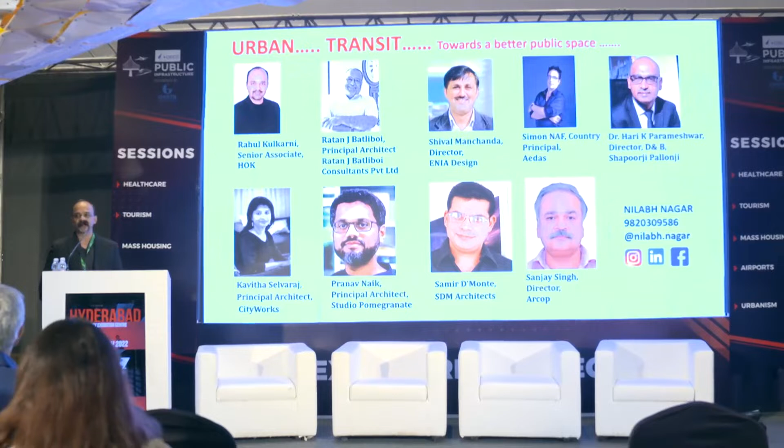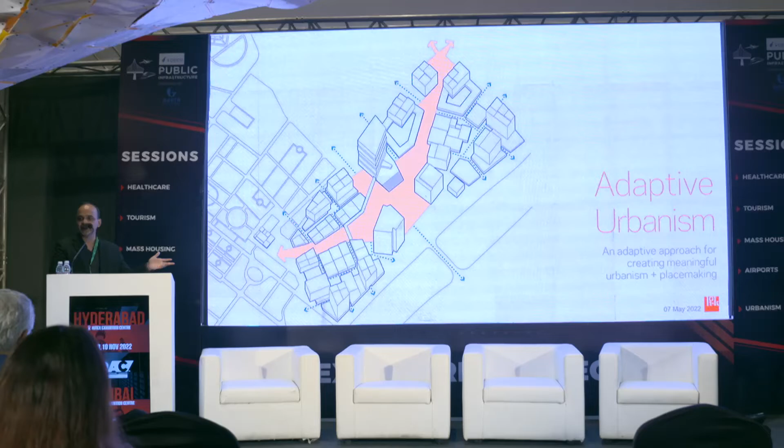I'm Rahul Kulkarni. I'm based in HOK's India office in Mumbai, and I work with our international offices to help coordinate projects in India. Today, I'm going to talk about a topic called adaptive urbanism, and this is a topic that's very close to my heart. I'm a master planner, urban designer myself, and what I wanted to showcase here was probably an alternative approach of master planning that our team has been practicing across the world. There are two case studies that I thought I could share, which might lead to some takeaways, hopefully. So with that, we'll get started.

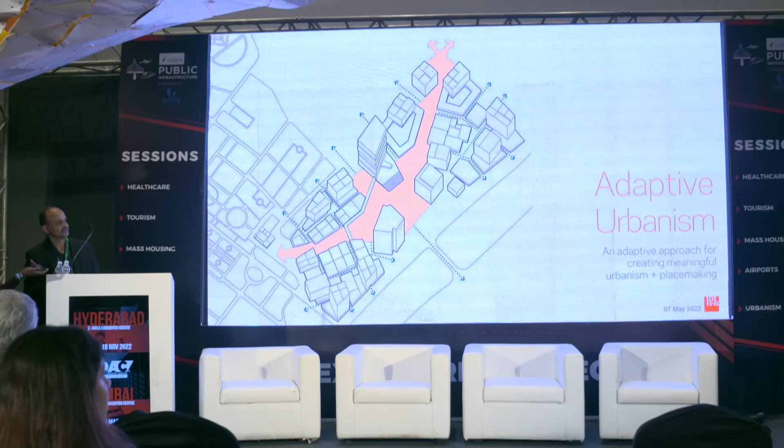It's been used too many times.

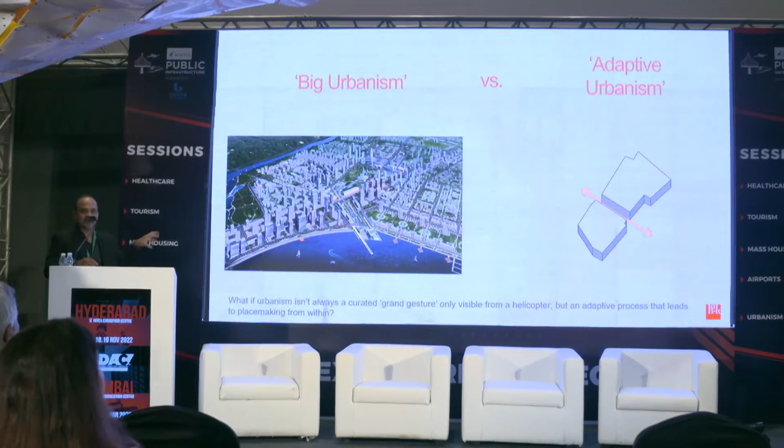So just a quick definition, what is adaptive urbanism? When we say that, what does that really mean? In broad terms, it's a process of perpetual engagement and reiteration. So instead of coming up with one solution and one master plan that everybody has to abide by, the concept is that a master plan is never really finished. We come up with assumptions based on the brief we were given, but things change, things adapt. A larger township or mixed-use development goes through a lot of cycles and changes, and market dynamics, etc. This process actually takes a particular shape or form, and we call it big urbanism.

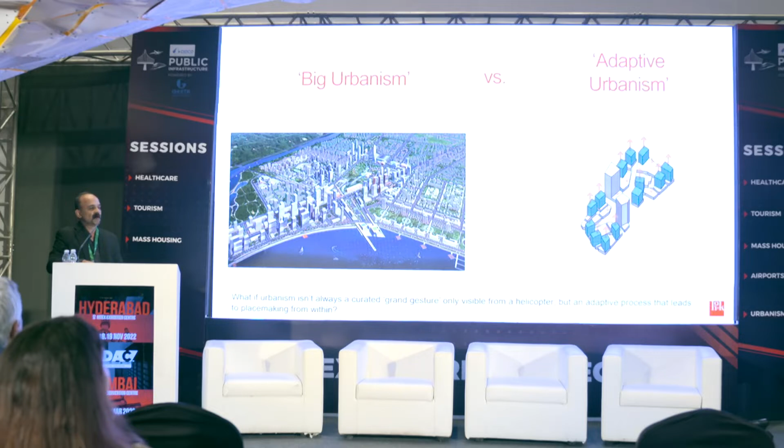Like a big move, or a grand gesture that probably is only visible from the helicopter, for example. When you're on the ground level, it's very hard to perceive those spaces. So what if there's a way to make a master plan or concept that grows from within, and that becomes the design and organizing principle? So that's what we're going to talk about.

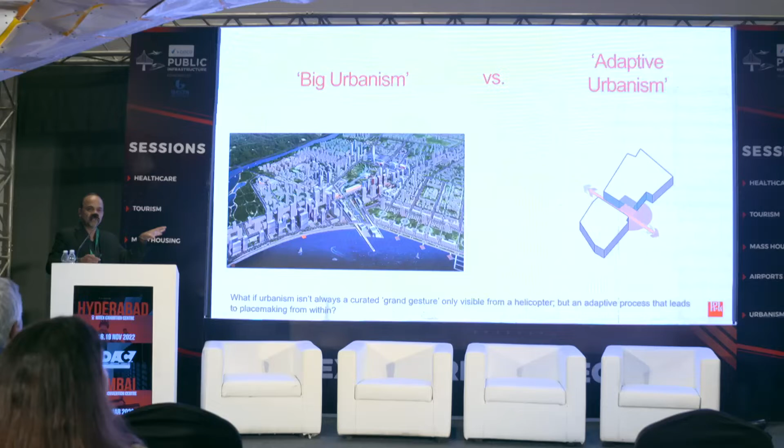This particular project is in Europe, but it's very similar to the conditions we find ourselves in India. There's a lot of density here. There are two plots. It sits along a water body, and one of the plots is next to a beautiful existing garden. This is about 14 acres on the north and 10 acres on the south, with an existing road in the middle.

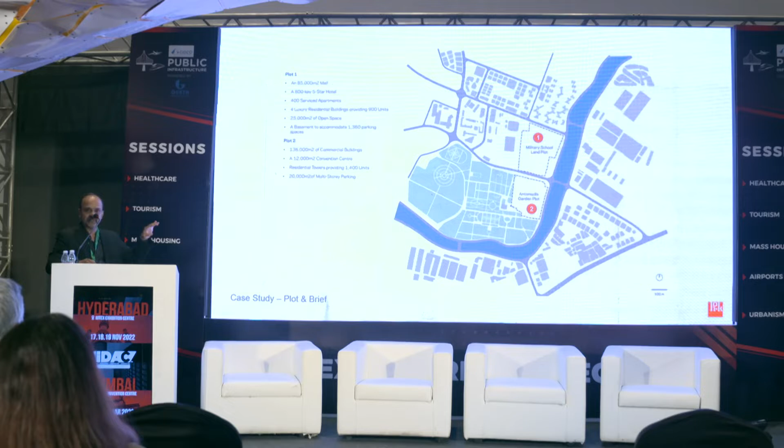So we started with a very simple approach based on the volume we're targeting in the design brief. I'm not going to get into the technical aspects of it. What I wanted to showcase was, we started creating a new heart, for example, where people would access it from primarily. From there, we started connecting the points to the places people would go from one point to another, intuitively.

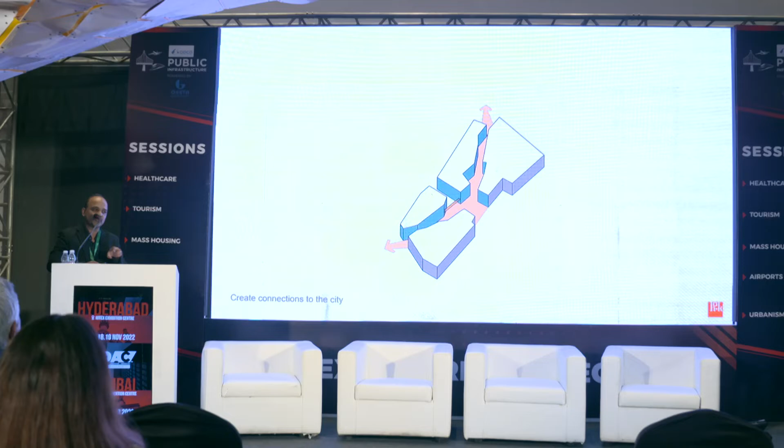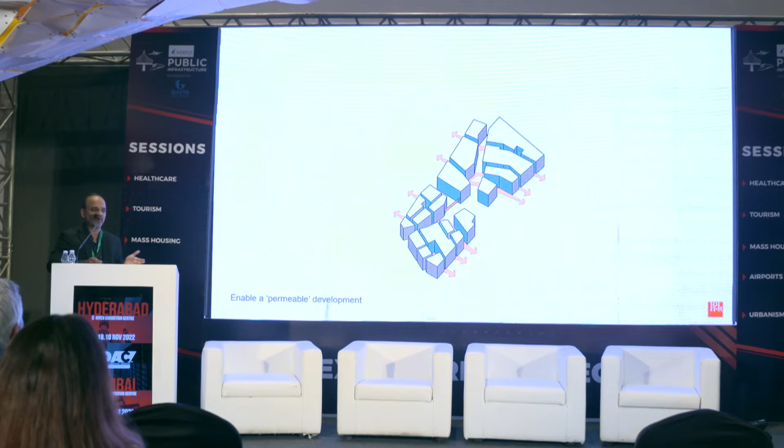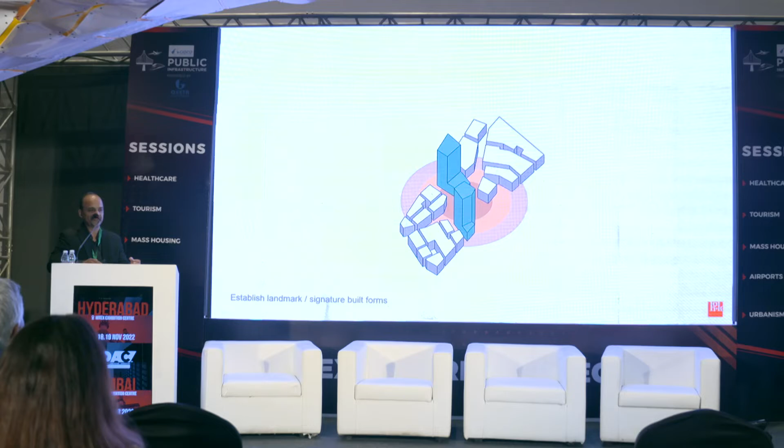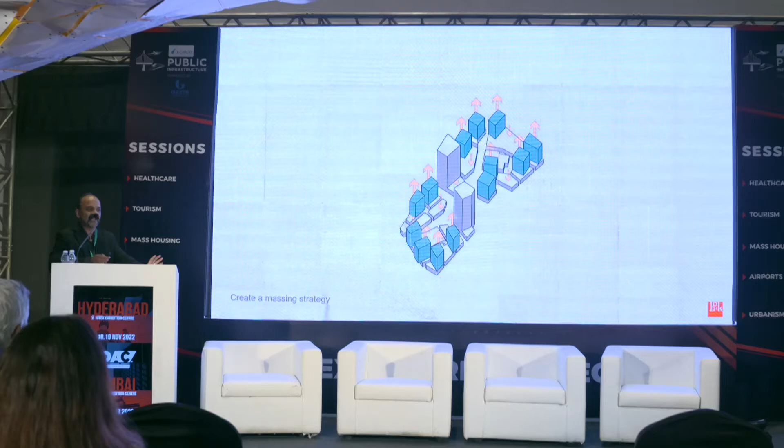So instead of creating a big urban swoop or making people go somewhere, we looked at ideas as to what path they might take, and what if we made that a little more permeable as we go, taking inspiration from the streets and markets that exist there. Then we started finding opportunities for signature towers, something that sits within the heart of the development, and created edges that become more and more permeable, connecting with the urban fabric. Given all of these parameters, we tested the heights, making sure we had the right FAR on the site, and met the development goals the client had.

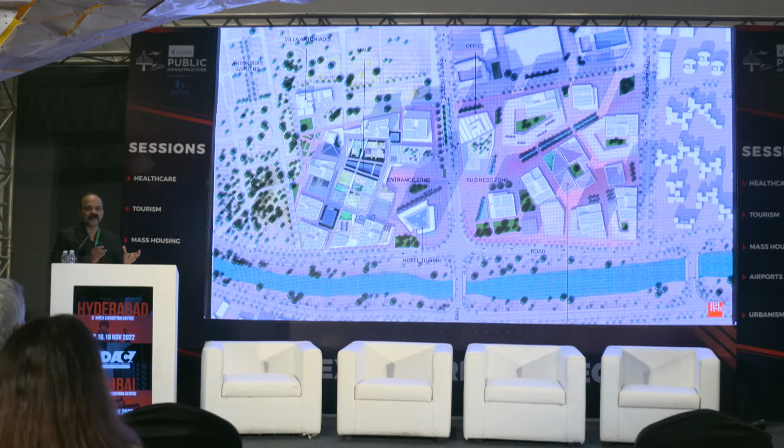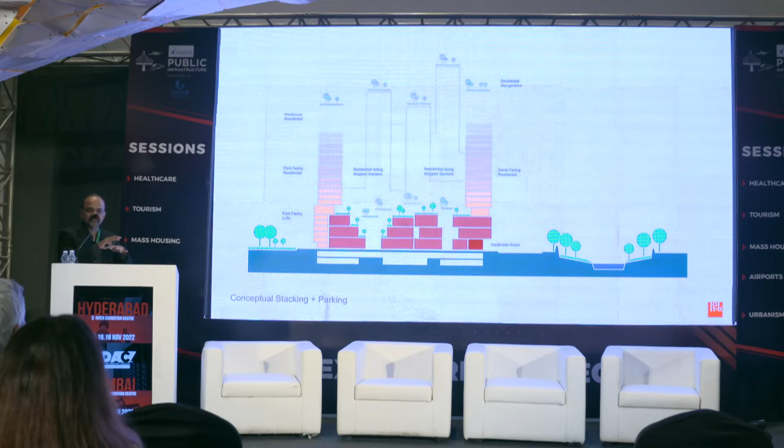We came up with this master plan. Again, it's not a closeted, closed environment like a walled city, but actually very permeable. It's very open, and all of the parking is in the basements. The reds you see are all the retail opportunities at various levels, and the residential, commercial and offices are all sitting together. So we created this really interesting heart of the project that I believe could be a different way of thinking about master planning.

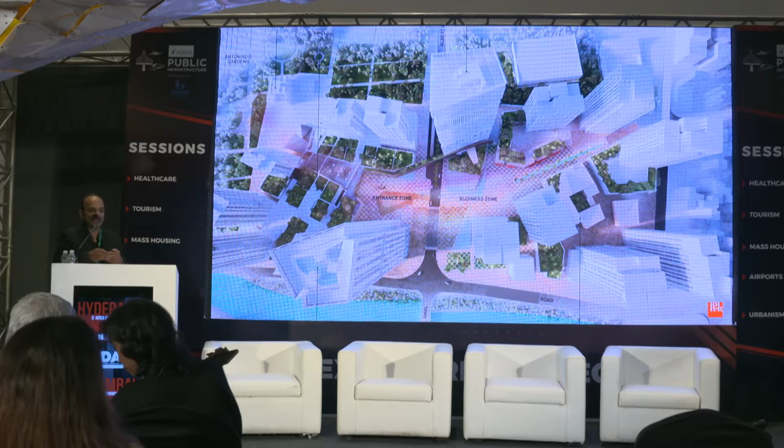If we have something like this, what typically tends to happen is we create these gigantic podiums for parking, and everything becomes closed off. Instead of that, we looked at an approach where things could be opened up more, creating an interesting way of organizing the same thing. That led to this design solution with signature towers that became the heart of the project. That's the hotel tower you see in the front, there's an office tower in the back, and residential and commercial at the base.

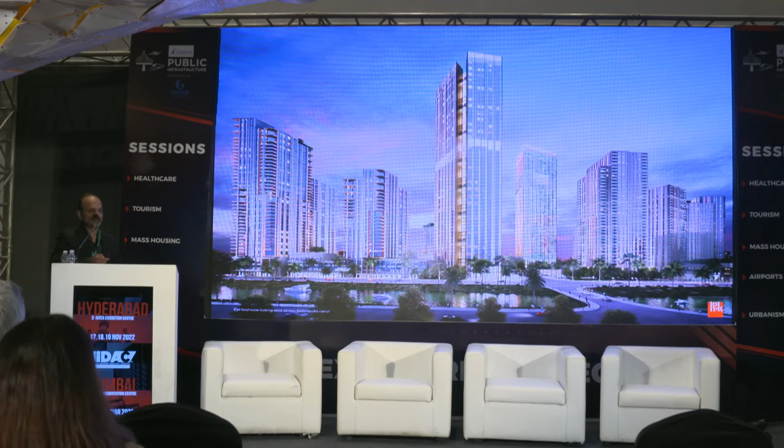The other way of looking at it, and I mentioned this a bit, is when you have a particular site, we tend to think of it just as that site. From a master planning or urban design standpoint, it's very important to see how this site fits within the context, because if everybody starts looking at just their own site, it becomes very difficult. It becomes an island development that sort of repeats itself. So you have many islands together, but nobody's thinking of how to coexist.

So this was a site outside of Bangalore that we did, and we were wondering if this type of project starts coming up slowly as agricultural land in India gets converted into commercial development. Then slowly, by 2040, you have all these different islands coming together, and nobody's talking to each other. Every project is becoming a little island in itself.

So with that thought, we were looking at a way to create something that will stitch the fabric together and allow these open spaces to become the guiding principle for the development. There were 4 approaches the team took: one was a central park, like an island development, or courts which has its own ideas. The graphic shows blues as the built-up area and yellows as the open spaces, or an idea of simply having bands or islands.

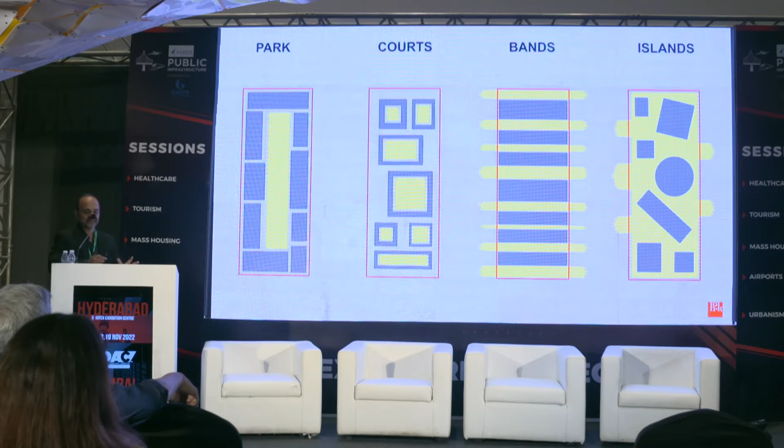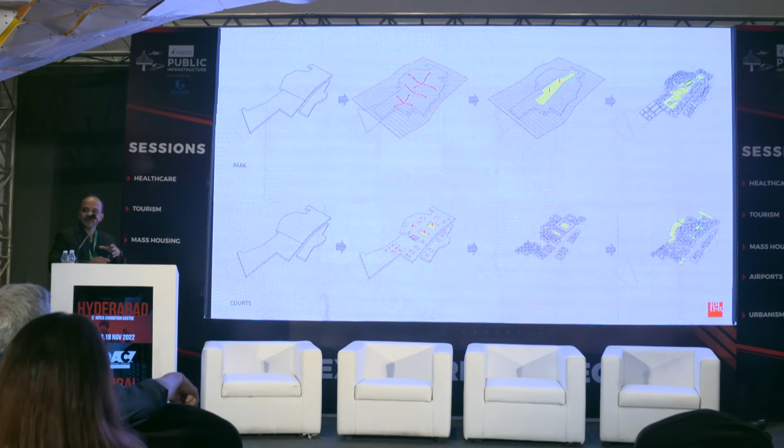So that was a very high level approach. We took the program the client gave us as a brief, and organized that brief on the site with these different typologies and ideas. Each concept had its own benefits and negatives, but after more deliberation, we came up with a combination of a central park and islands, which we thought would stitch this fabric together.

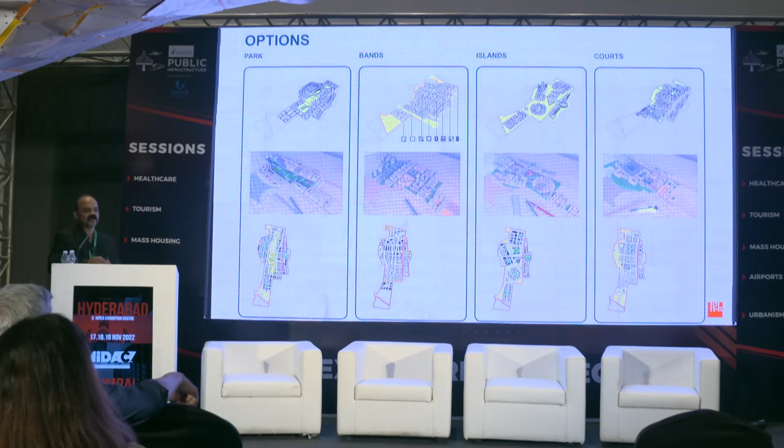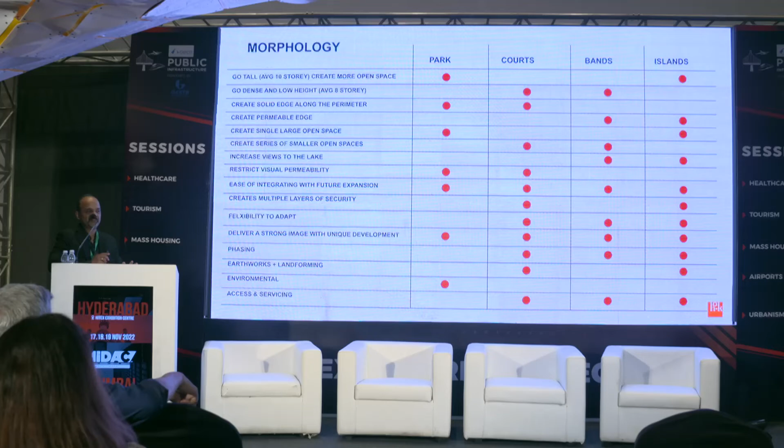So we looked at a lot of analysis around how the site would be accessed, where you would park, and different matrices to see which approach was the most flexible. With that, we came up with this particular approach.

Again, here it's not about the buildings, it's about the master plan, about the open spaces becoming the guiding principle for the overall development. Instead of creating a shape and putting open space in it, this was exactly upside down, with open spaces connecting to the surrounding areas. There was a beautiful lake next to it, which we connected to.

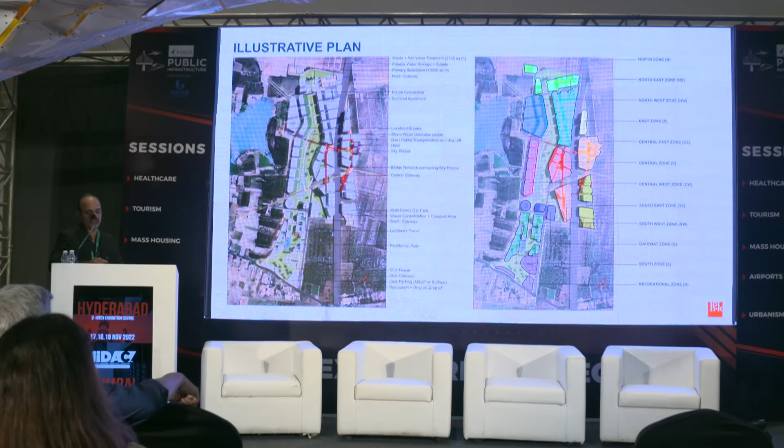The idea was to have a very permeable development, and then figure out how to locate these buildings along these open spaces. How do the buildings actually relate to those open spaces? We created a series of walkways that connect the project.

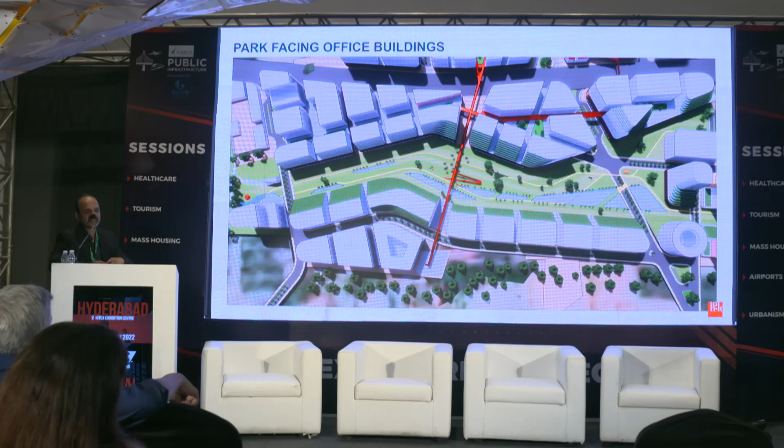There was an existing road that cuts through the site, so we had elevated bridge walkways to connect the two sides. That would eliminate people going down onto the street, crossing the road, and going into the other side of the project.

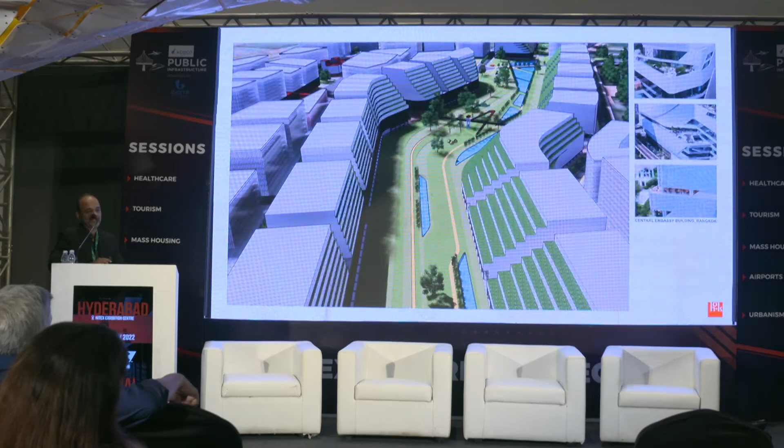Then we started carving the buildings, asking how they respond to the park. What if all the buildings had access to the park, and all had an internal address rather than an external vehicular drop-off? These were intended to be tech companies occupying this park.

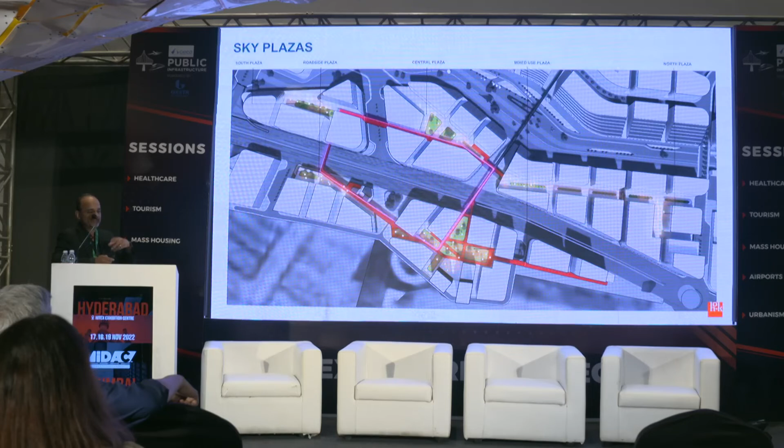The thought was that collaborations happen within the open spaces, so the open space isn't just a visual amenity but becomes the organizing principle, as well as a place for people to come together, speak, and maybe form new collaborations. We had ideas about sky plazas and courtyards, and did a lot of imagery analysis to find the right scale.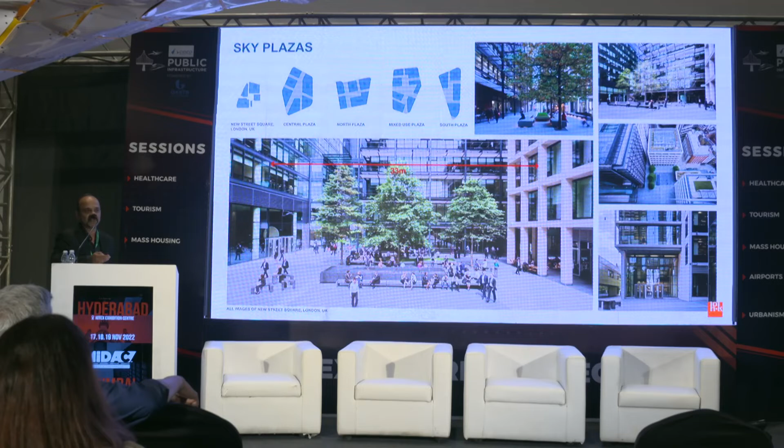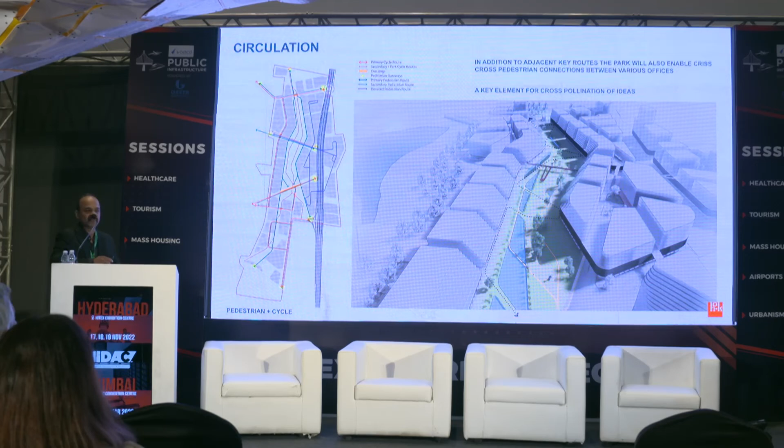Some ideas about bridges connecting different sides of the project, and the circulation strategy, creating a natural path someone would take from one point to another to really create an environment for cross-pollination of ideas. That was the intention, and it was very pedestrian friendly, with all vehicular traffic on the outside.

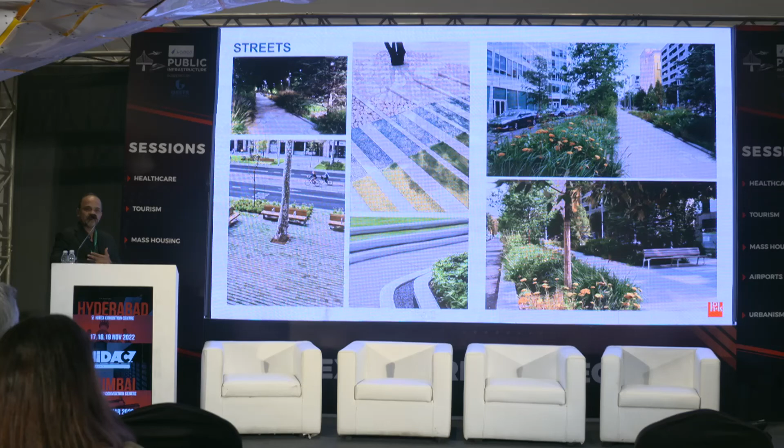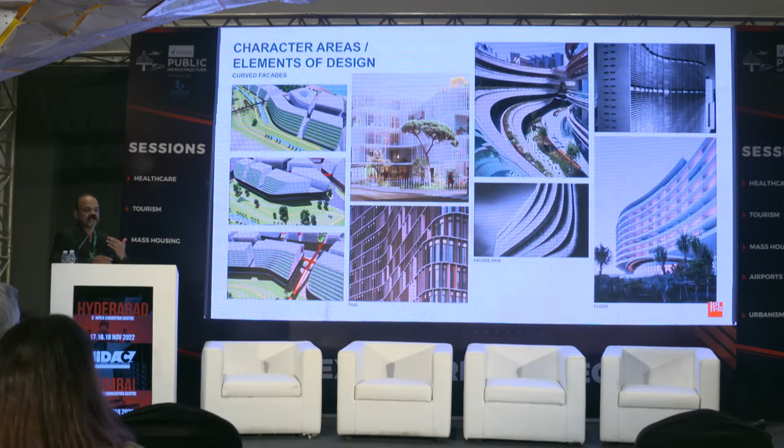We came up with a lot of imagery analysis for the client to develop the street patterns and different character areas, and how the buildings could relate and step down so everybody had access and views to the open spaces.

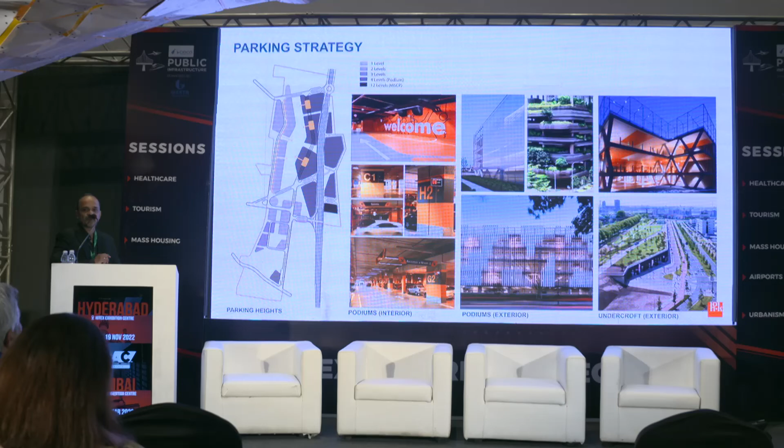And then finally the parking strategy, which obviously is of prime importance in projects like these.

So just wrapping up this discussion about adaptive urbanism: the idea is to create a solution that works with shifting demands and external pressures. As we know, the real estate market tends to be very dynamic, so the idea was to have a master plan that continues to be able to adapt.

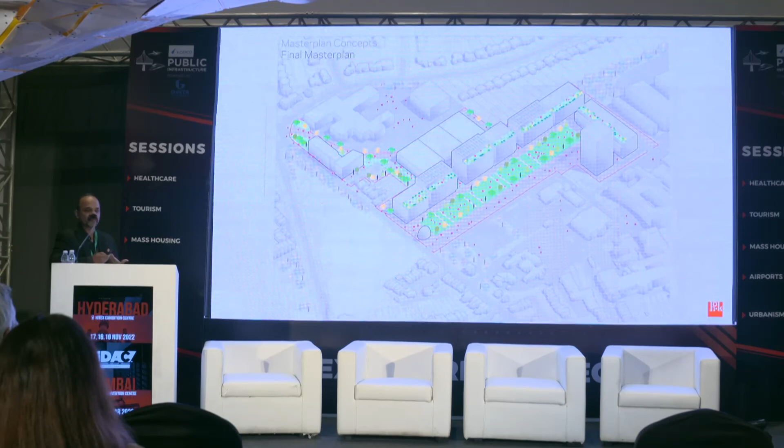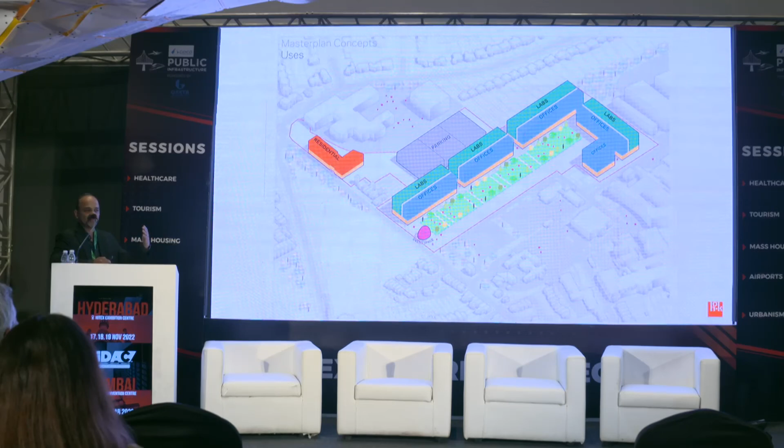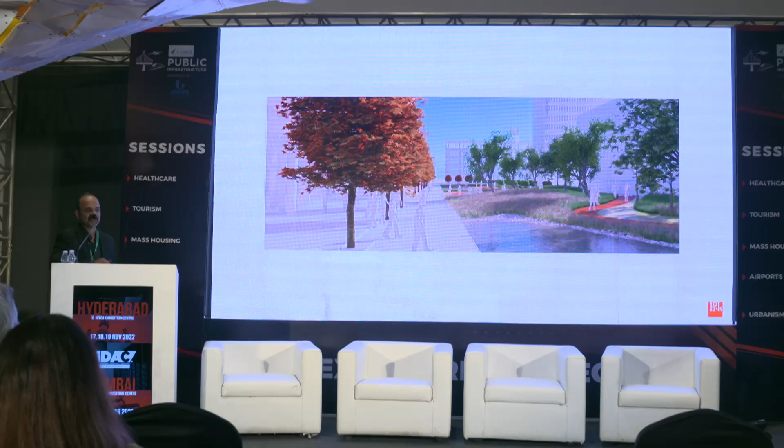Those were the proposed developments coming along. Some ideas about how that park might feel, and how it can be a container for lots of open spaces, ideas, and activities within those.

These are some ideas about a different project altogether, but again showing this idea of permeability and bridging across two or three different parcels, and how that can lead to a very interesting project. This one is in Turkey, and this one is in Indonesia. That's all I had, thank you.